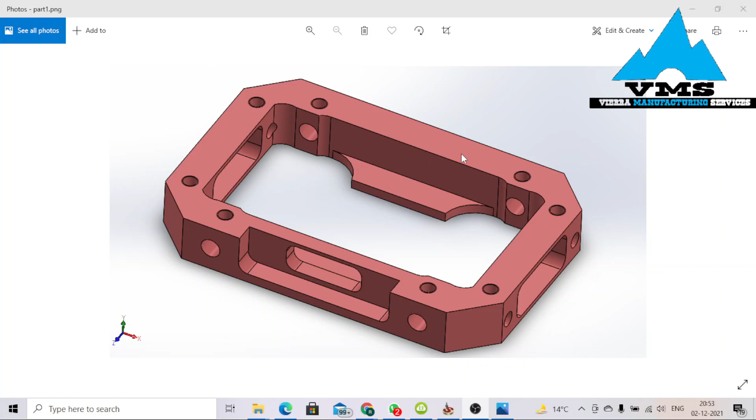Okay guys, in the last tutorial we successfully completed the VMS project 1. In this tutorial we are going to be speaking about the VMS project 2. Let's get started rapidly. These are just the drawings: drawing 1, drawing 2, and drawing 3. Let's start with drawing 1.

Okay, let's open the software. File, new. Just drag this path.

Okay, so looking at the first drawing, considering the third angle projection, this is the top view, front view, and side view. First we are going to draw a rectangle. One thing again, dimensions are only in inches, so we have to be working in inches guys. So rectangle of 5 by 1.95, then we have to put a chamfer and then an extrusion of 0.75.

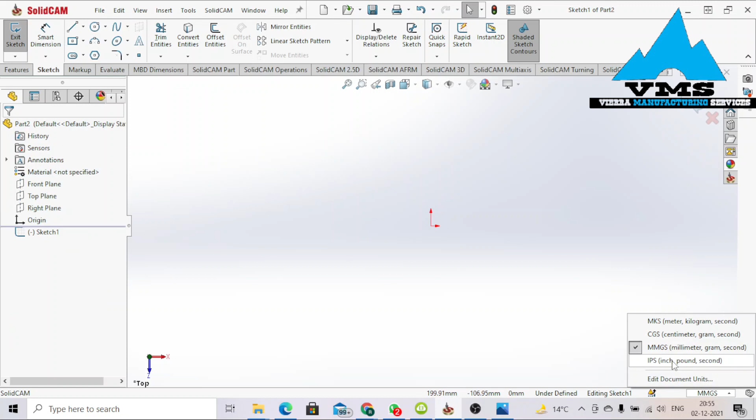Okay, let's do this. So 5 point, okay good. Top view, sketch, top, center rectangle. Oh, one thing first, sorry, convert the unit in inch. Okay, sketch, top view, center rectangle.

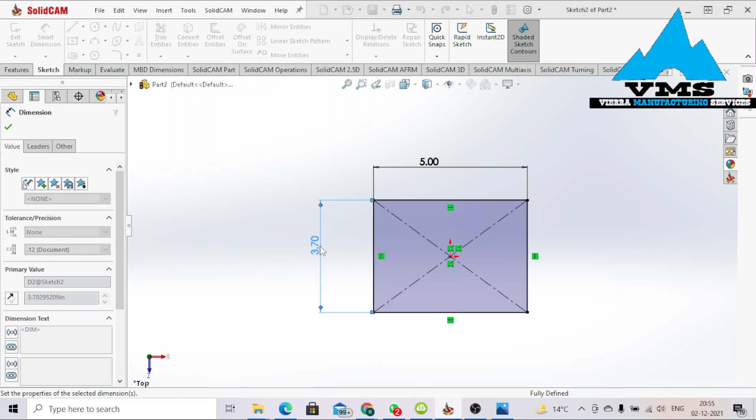Okay, smart dimension. Okay, 5. I think it's 5 by... was it 1.95? Let's just check this rapidly. Okay, 5 by 1.95, with a chamfer of 0.25 at each side.

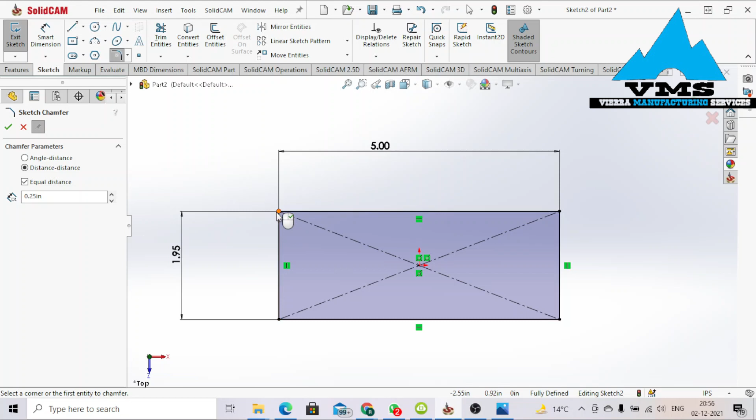So this fillet we'll do later on. Chamfer of 0.25 and an extrusion of 0.75. Okay, chamfer, click on chamfer command. 0.25, enter. This edge, vertex, this vertex, and this vertex. Okay, finish sketch.

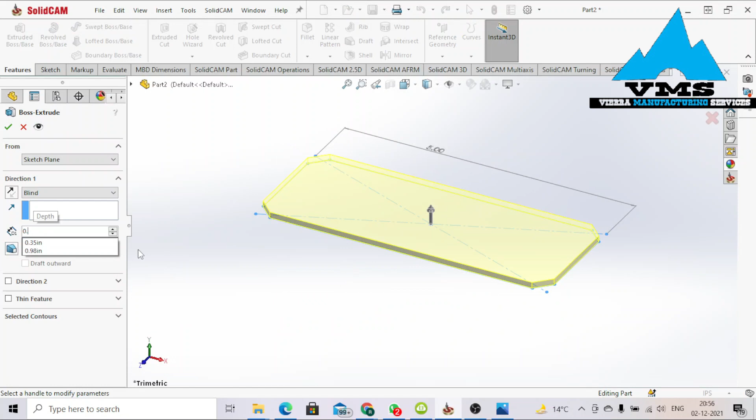With sketch 2 selected, or sketch 1, an extrusion of 0.75. Okay, making sure we have blind here. Okay, fine.

Okay, looking at the diagram, we have a fillet. Just look at these edges, it's broken. So we have a fillet of 0.13 at each side equally. Fillet command, 0.13.

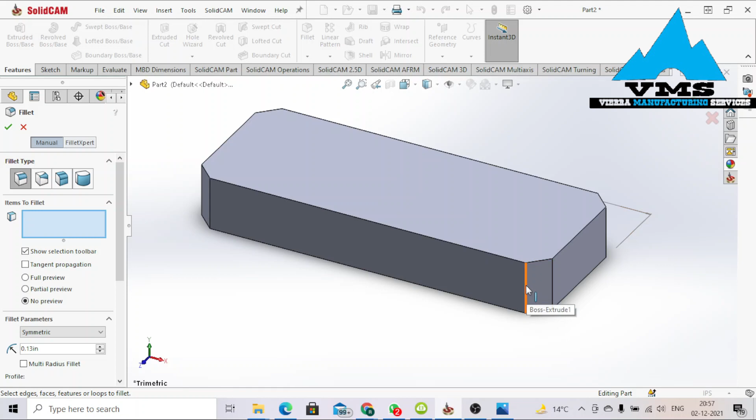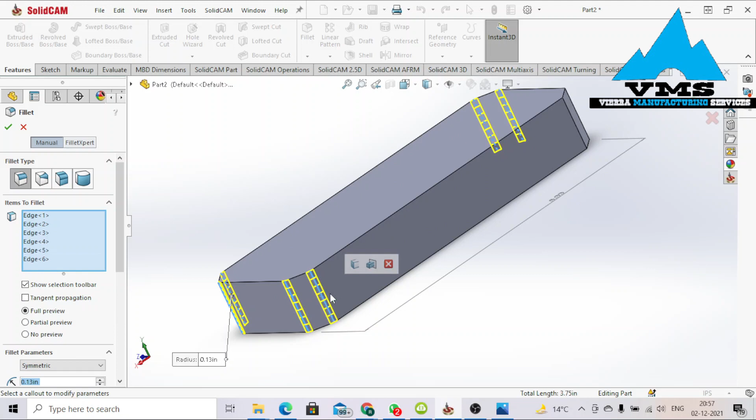Okay, so select this edge. You could just make full preview, then select this edge, so every edge. Oh sorry, just cancel this. Yeah, making sure that all edges are selected. Okay, I think we are good to go. Okay, fine, okay so far good.

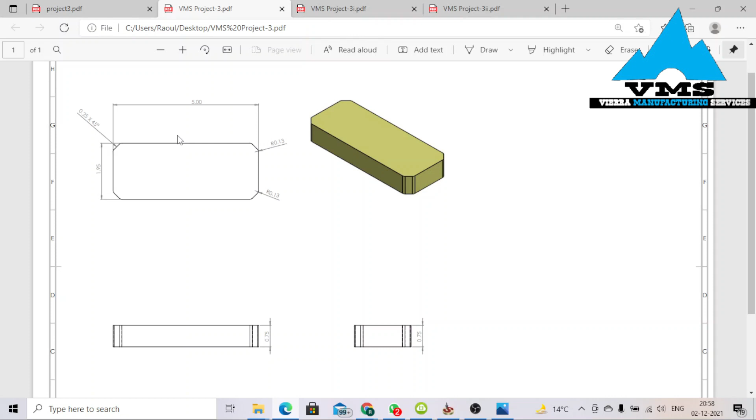Let's look what is next. Okay, I think we are done with this sheet guys, so let's go to the next sheet.

Okay, so in this sheet we have this cutoff, at this point and equally at this point. So looking at our drawing, we will just draw a rectangle, corner rectangle, making sure that it's of width 1 inch, and the distance from the edge should be 0.5. Okay, let's do this.

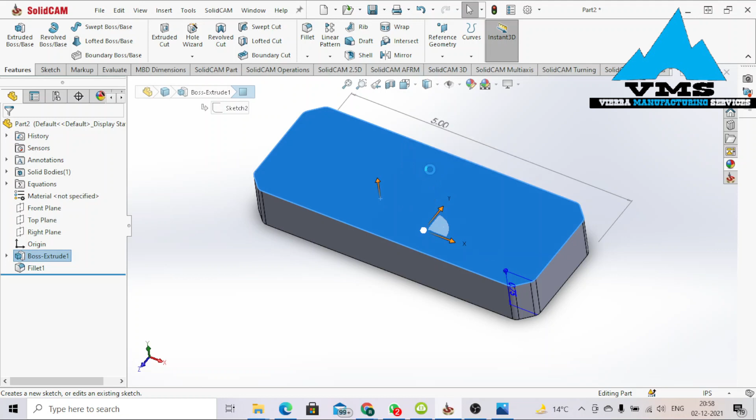Okay, select the surface, sketch, just place a center line, make sure to trace out. Okay, making sure your center line is straight, right click, construction line. Okay fine, corner rectangle. Okay, just take this point and this point.

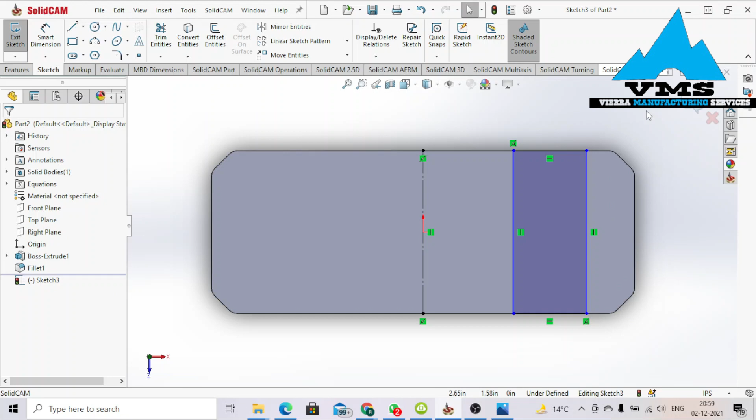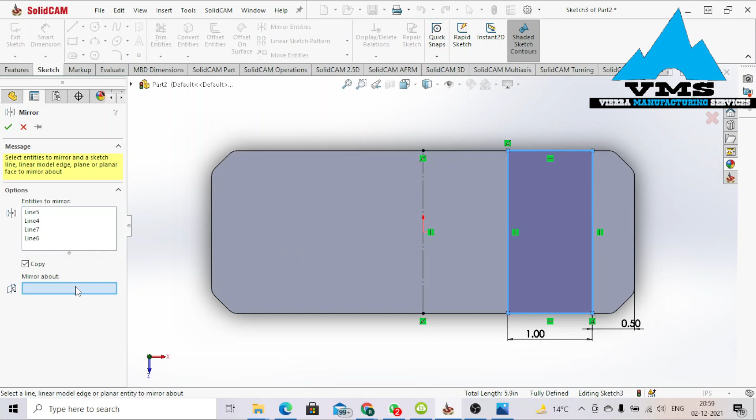Smart dimension, making sure here that it's 1 inch. The distance from the edge should be 0.5 inch. Okay, it's fully defined. So mirror entity, this point, mirror line, the y-axis. Okay good.

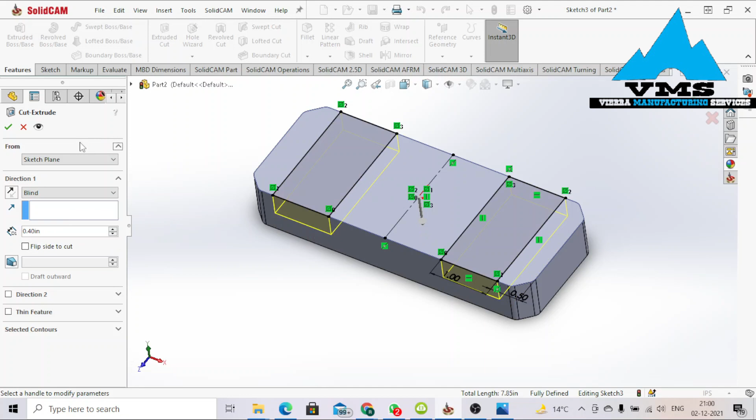So we have to extrude this by, just follow down, we extrude it by 0.4 inch. Okay, so extrude cut. Okay good, 0.4 inch, okay perfect. Okay just fine, I was just trying to cover this. Okay good.

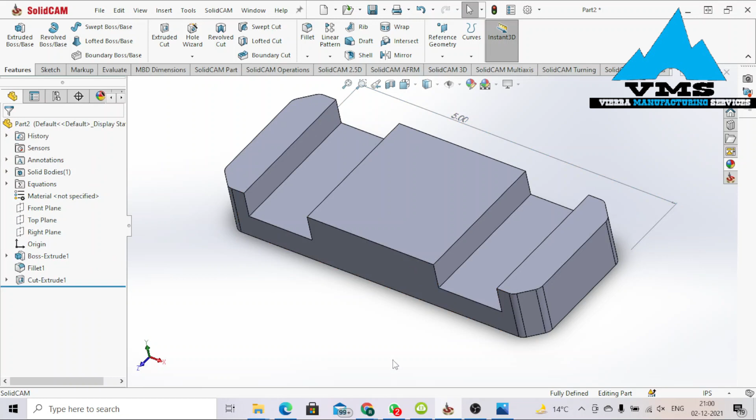This dimension, I don't know, I don't want to go. Okay good guys. Okay, let's see what's next.

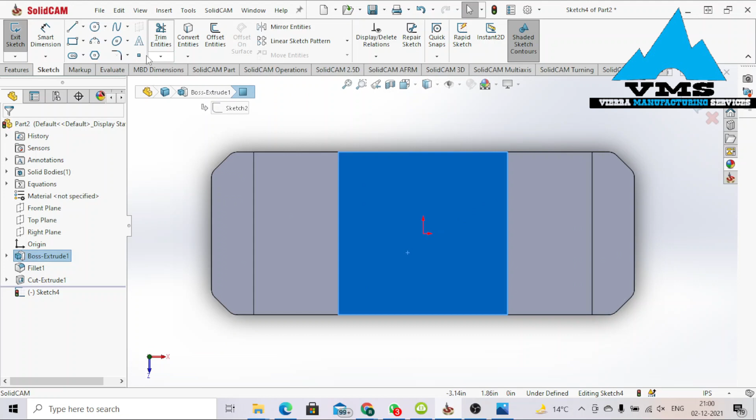So one thing we are going to do is select the surface, sketch, just take point, put it this way. Yeah, just something like this. It's not that perfect, but it's okay. Okay, let's just go back here.

This point and this one, it should be vertical, horizontal. Okay I see, so this point and this point, horizontal relation. Okay, this point and this point, vertical relation. This point and this particular point, vertical. Okay, this point here and this one, horizontal relation. Okay, this point and this point should be horizontal. Okay, it is good for now.

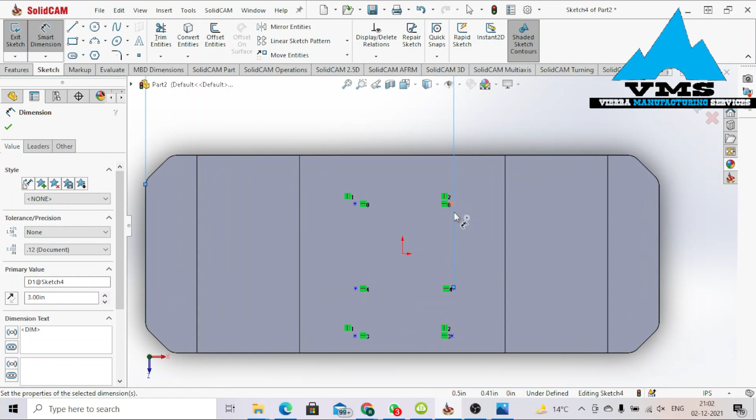Okay, so smart dimension. Okay, so from this point to this point, we have 3 inch. Okay, so next, from this point to this point, we have about, if I'm not mistaken, 2.88 inch. Okay fine.

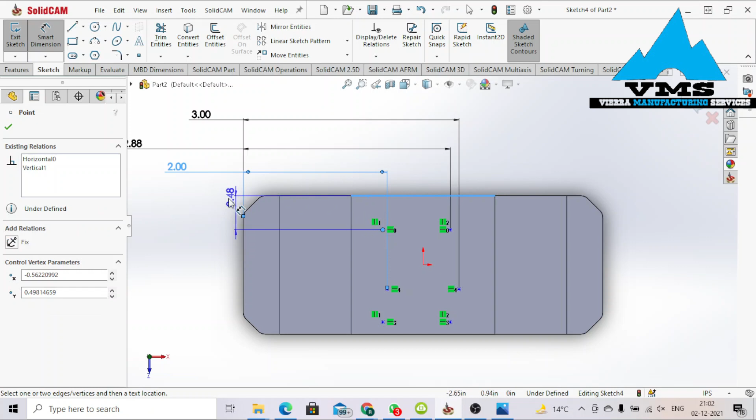So I think from this point to this point, we have... was it 2 inch? Yeah, it is 2 inch. And the last was 2.13. Yeah, this point to this point. Oh sorry, this point to this point. Good.

2.13 inch, okay fine. So now from this point to this one, we have 1.6 inch. Now the distance between this point to this upper edge is 0.3, and then we have 0.98.

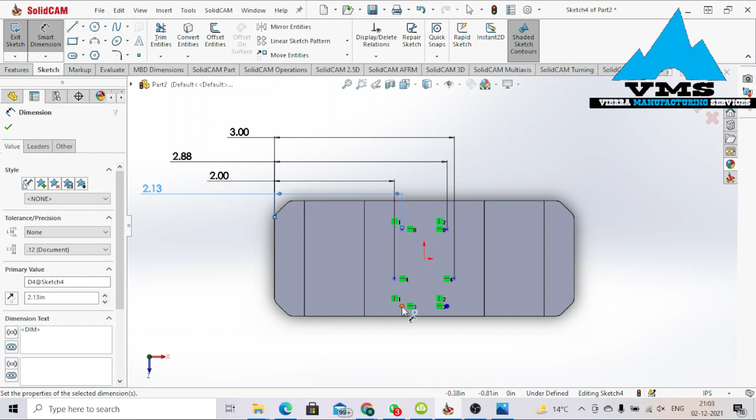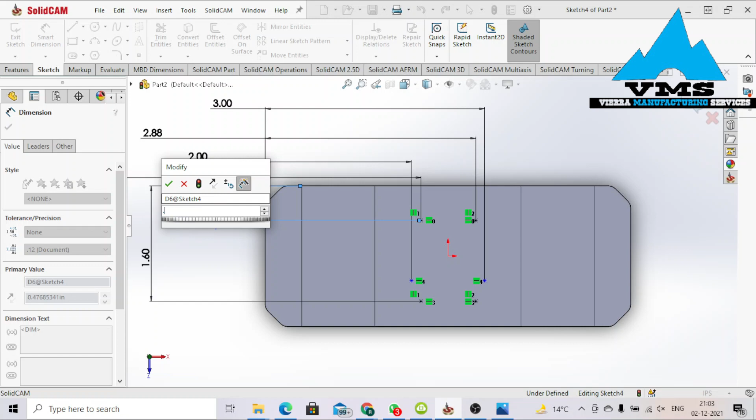So let's apply this. Smart dimension, okay, what is selected? So the distance from here to this point is 1.6 inch. Okay, so we got equal distance from here to this point, which is 0.35, and the distance from this point to this point, we have 0.98. Okay good, perfect, it's fully defined.

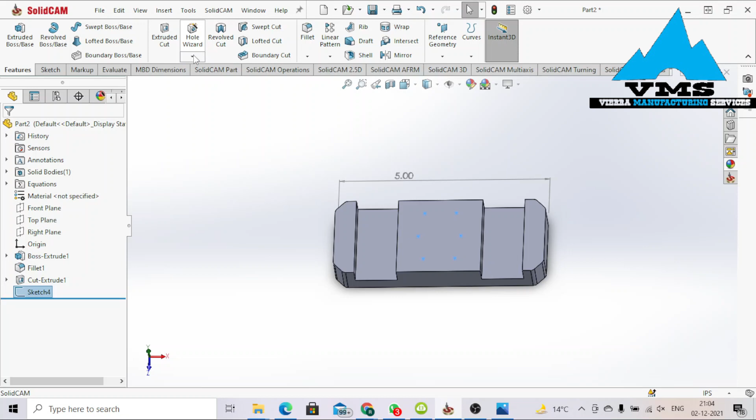Okay, exit sketch. Okay, hole wizard. Good, so let's look at this.

So as you notice, anytime we have a variation in diameter, so it's a tap hole with extrusion of 0.58, and again we have another extrusion of 0.38, that is for the chamfer, and again we have a countersink of 0.28 at 90 degrees.

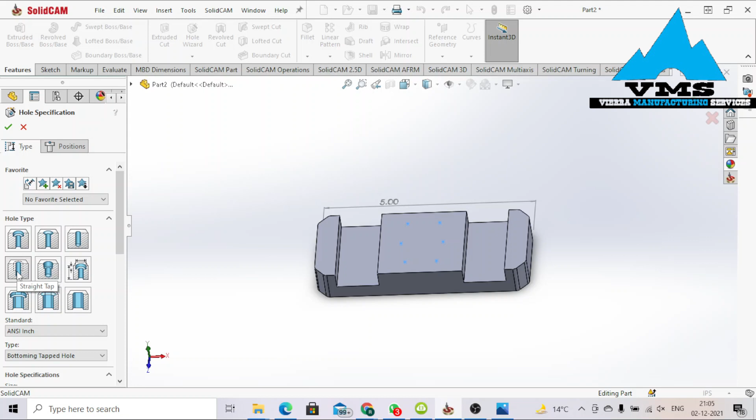Okay, let me show you guys how to put this. Just push this. Okay, so firstly, tap hole selected. Okay good, so standard it should be inch, type, bottoming tapped hole. Again, hole specification, as you notice, the hole specification over here is 1/4-20, so it should be the same, 1/4-20.

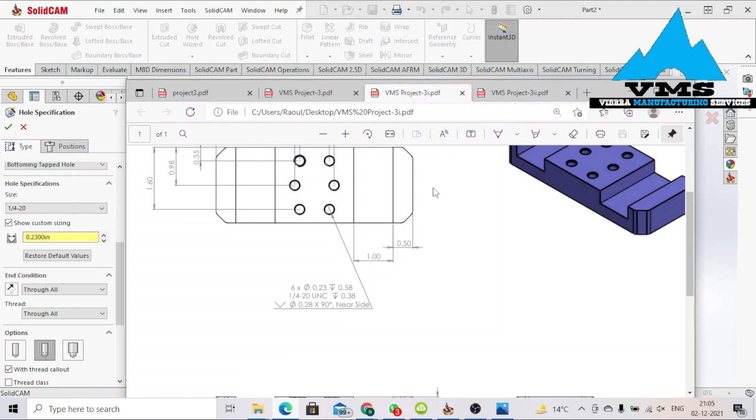Okay good, now show custom sizing. This custom sizing should be the same equally. Just a moment, okay, so custom sizing should be the same, 0.23, okay fine. Looking at the diagram, we have 0.58 as extrusion, so blind 0.58, okay fine.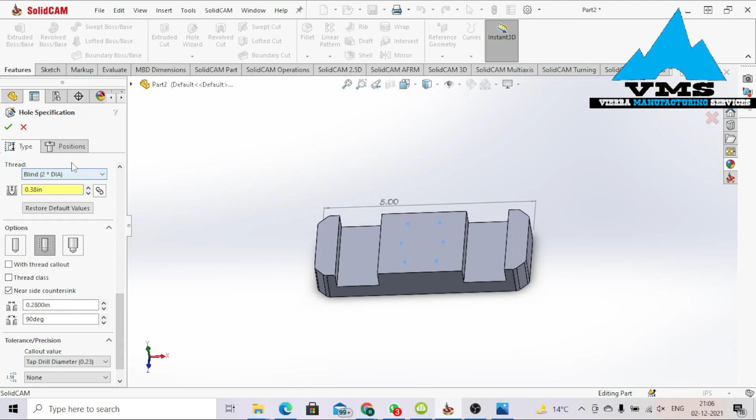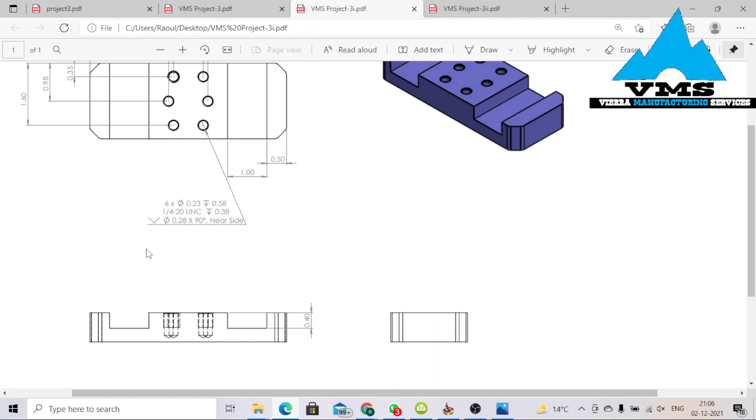Okay, it's all fine. So next thing is just click on position, 3D sketch, then just select this point, this point, this point, this point, this point, and this point. Okay, so click on OK. Those are the holes, perfectly done. Okay, so the holes are perfectly done. Let's go to the last sketch.

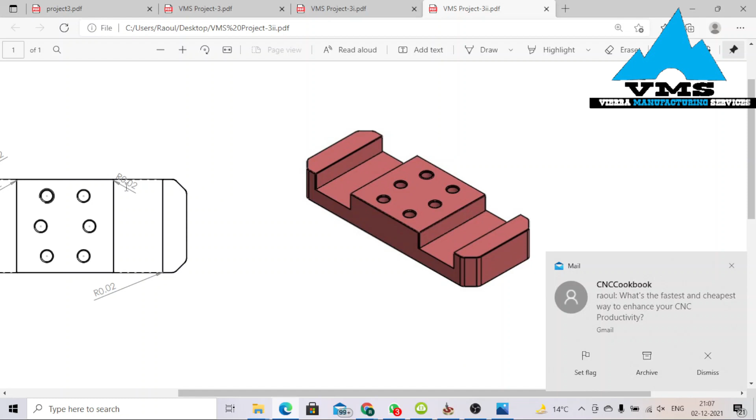Okay, so looking at this, we have fillets at this particular end. Let me just zoom the screen. So we have fillets at this particular edges, right? And this fillet is about 0.02. And again, we have surface chamfer of 0.01.

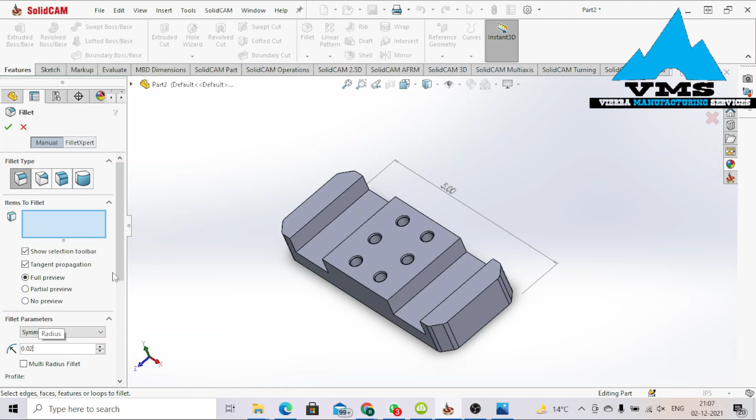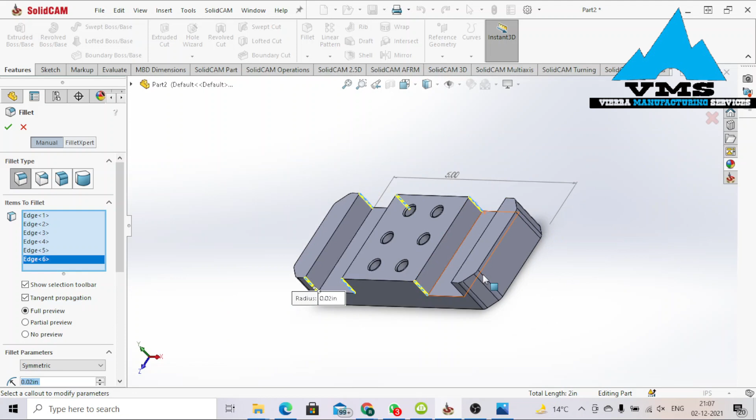Okay, so let's do this. Fillet 0.02. Okay, so let's take this edge, this edge, this edge. So make sure to select all edges. Okay, all fine. So click here. Okay good.

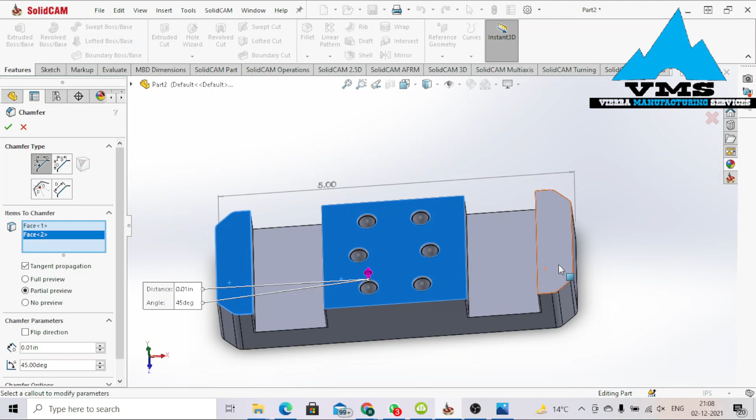So next is chamfer. Taking a chamfer of 0.01 at the surface, so just select this face, equally this face, then just rotate the diagram and equally select the bottom face. Okay, all good.

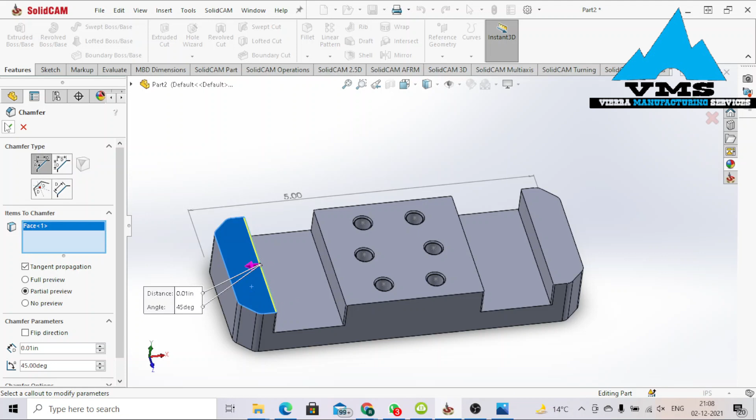Something wrong, do one thing, just unselect. So select this face. Okay, let's take this face. Oh sorry, this face, and again this face. Let's check, no, not working. So let's take one face, this face. Okay, so this works. So repeat back chamfer.

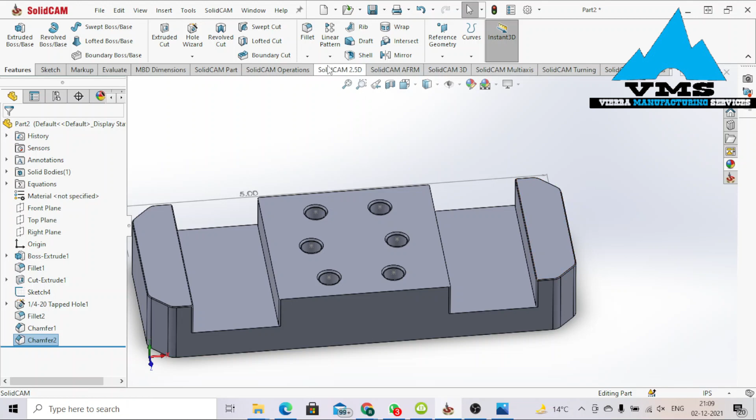Okay, this face. Okay, not working, so unselect this face. Okay good, so chamfer again. Just take one by one in case. Okay, just rotate the diagram, this face. Okay good, so here we have this. So here at this particular center, no need to make chamfer, so it's perfect.

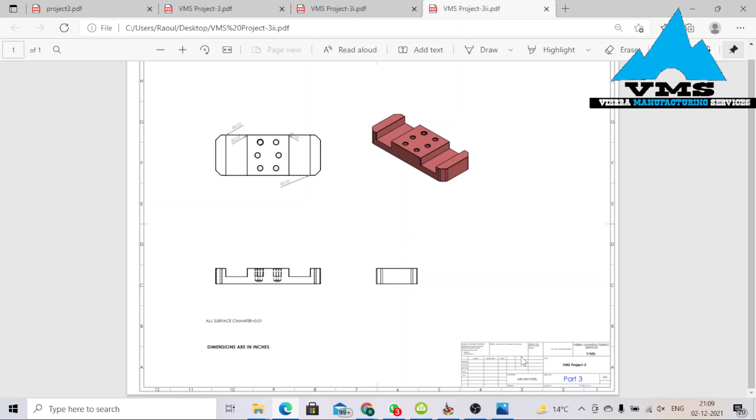So looking at the diagram, we are done. We are totally done with the VMS project 3. Okay, one thing more guys, we have to add material. Looking at it, we are using 304 steel. So our material here is 304 steel, so we have to add this material. Let me show you guys how to do this.

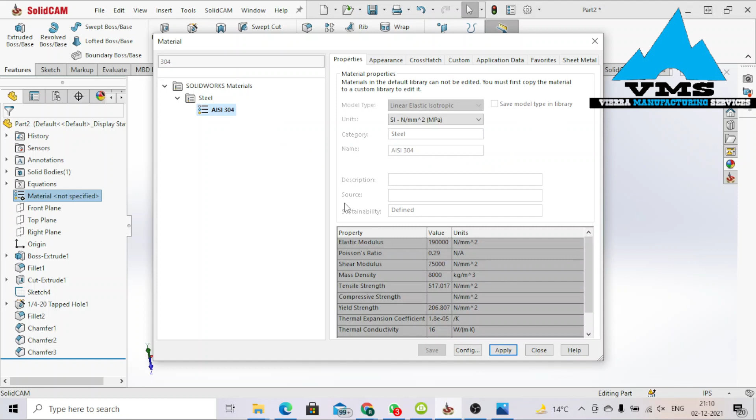Okay, so just go under this material. As you notice, it's not specified. So just right click, edit material, then just write 304. Good, so just select this and then apply, and then you can just close.

So as you notice, the material right now is steel. Okay, just click on the body, then come on appearance, click here, click on body. So we have to change the color. I think our final project looks kind of red. Let me just check this. Okay good, it looks kind of red. So good, so just take the second one.

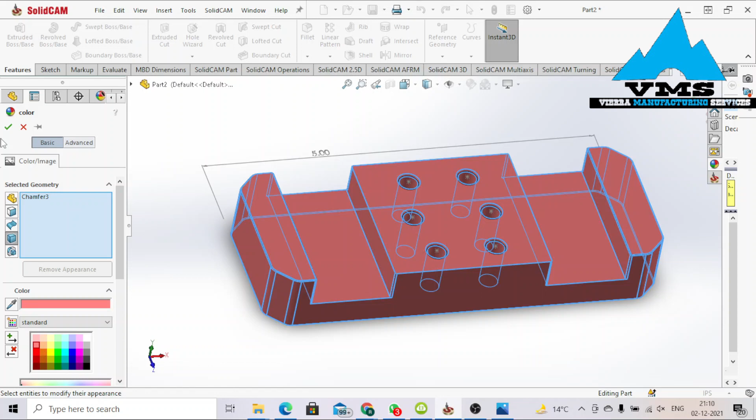Fine, okay. Okay, thank you guys, we are done designing the VMS project 3. So in the next tutorial, we are going to be generating the M&G code.